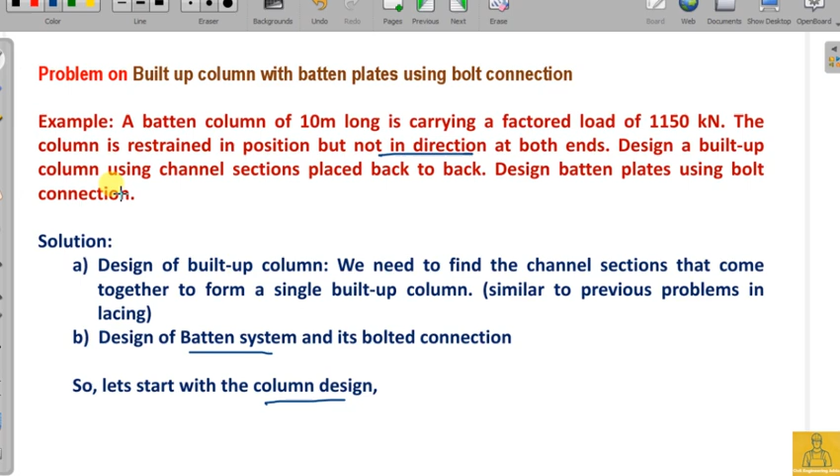This is the solution. So let us start with the design of column. The load acting on the column is 1150 kilonewton and the length L is equal to 10 meter, that is 10 into 10 to the power of 3. But in this case, I am multiplying with 1 because this L is nothing but L effective in this case, because both ends are restrained in translation but not in direction. In this question, it's restrained not in direction but in position. So it is hinged, therefore K value will be 1 and therefore K into L is L.

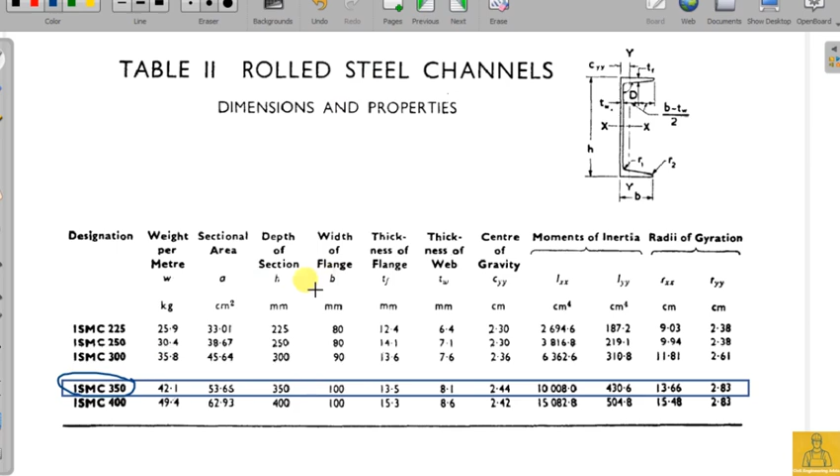53.65 centimeter square. You can convert into mm square by multiplying with 100, and you get center of gravity CYY, IX, IY, RXX, RYY, and flange thickness.

What is the flange thickness? 13 point something. Flange width B is 100, thickness of the web is 8.1, depth of the section is 350.

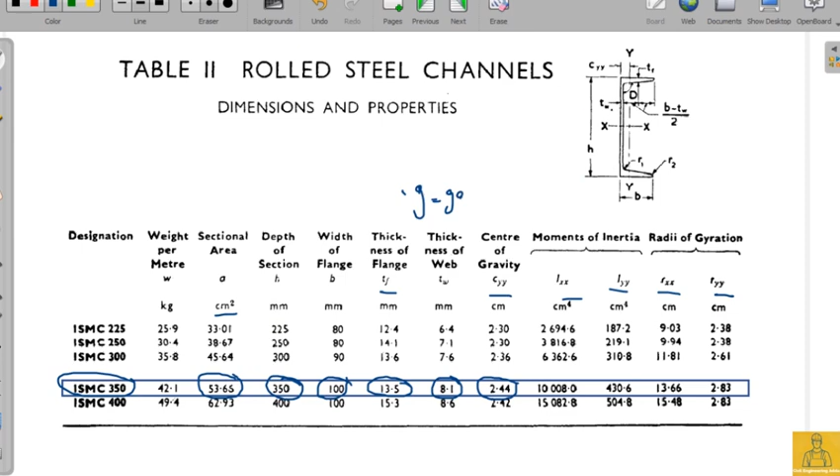And see here, gauge is taken as 60. Okay, so now

we are providing actually more area than required, isn't it? We are providing each channel section whose area is 5366, so into 2. This is the area that we are actually providing.

Now let us find out what is the actual FCD. Initially in this step we have assumed the value of FCD, isn't it right?

We have assumed the value of FCD to find out the area required, because we have the formula P equals FCD into area A.

In order to calculate A, I should know the remaining two terms. So I know P, I assumed FCD, but this FCD which I have assumed is just meant for finding out the channel sections required.

But now I have decided what section to be used, and I know what area I am providing for the build up section. So now calculate what is the actual FCD.

Okay, so how do you get this? This is simple. You can get this FCD. FCD is obtained by

table 9C of IS 800. But in order to find out the actual FCD, you need to know what is the slenderness ratio of the built up section, built up column, and also Fy of steel.

Fy of steel is 250, you know that, 250 Newton per mm square in all the cases. You need to know what is the lambda of the built up section.

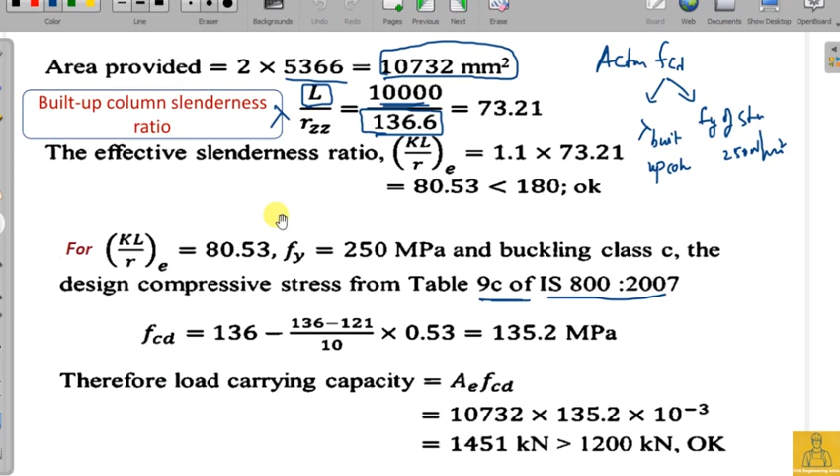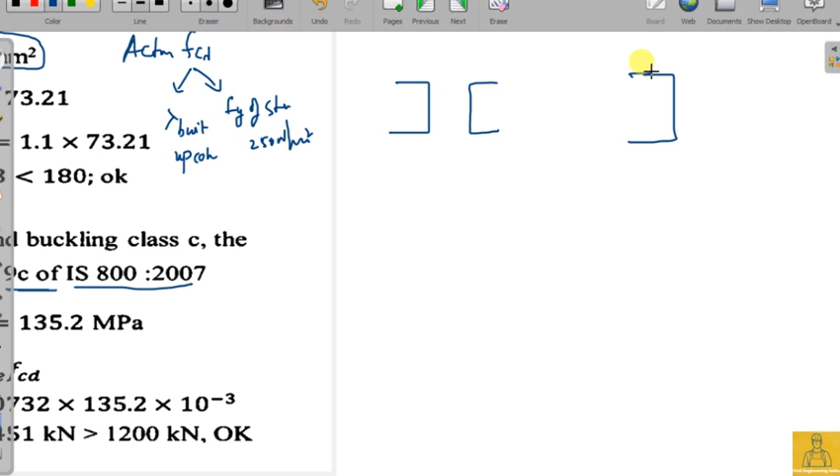Okay, let me take this. See, this is how the channel sections are being connected. Actually, channel section is something like this, right? This is the

ZZ axis, and this is YY, and this is the ZZ axis of the build-up section, and this is YY. If you notice here, this individual channel section has radius of gyration about ZZ and YY.

And in a similar way, for the built-up section also, you have RYY and RZZ. See, this axis, ZZ, is passing through the centroid of the channel sections, built-up section horizontally, and in this individual case, it is passing through the centroid of this C section or channel section.

But in both these cases, RZZ of the built up section is going to be equal to RZZ of the individual channel section. About ZZ, it is not going to change.

But RYY of the built up section is not going to be equal to RYY of the individual sections, because the axis has been shifted, but the ZZ axis is not shifted, it is passing through the centroid.

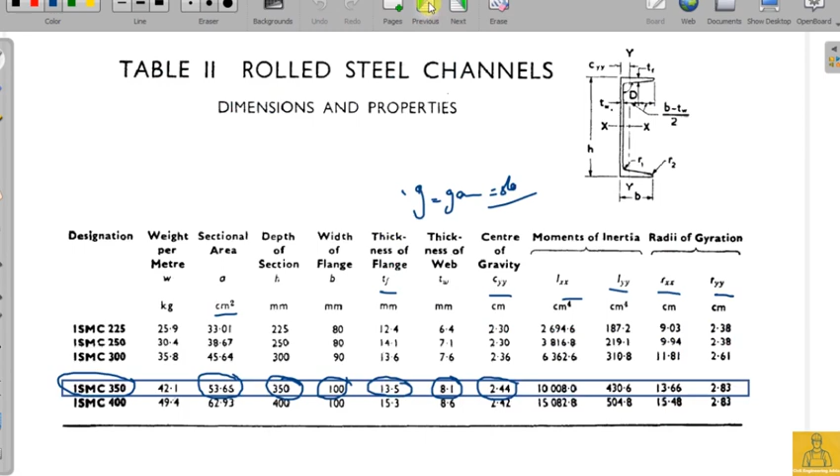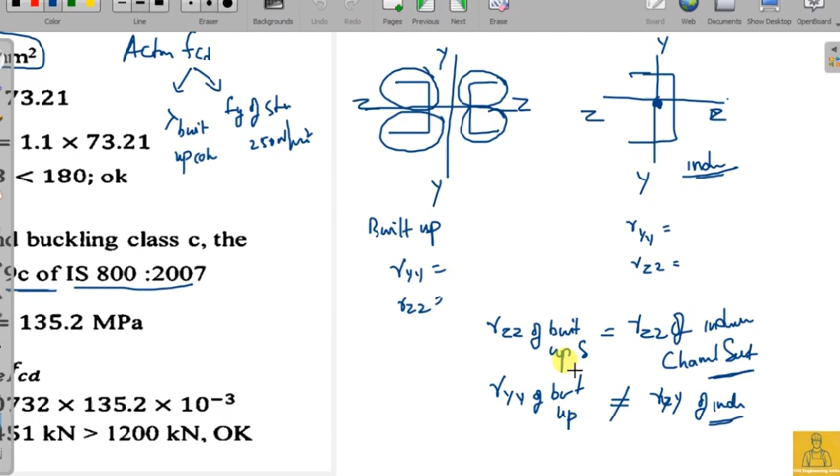From the previous slide we have seen the RZZ of the individual channel section is 136.6, so you can take the RZZ of the built up section also as the same. That is how I got this RZZ as 136, even though I am calculating the lambda of the built up section. So I got 73.21.

Now I know that this slenderness ratio has to be increased by 10%, so multiply by 1.1, and I got 80.53, and this slenderness ratio should be less than 180. Yes, of course it is, so safe.

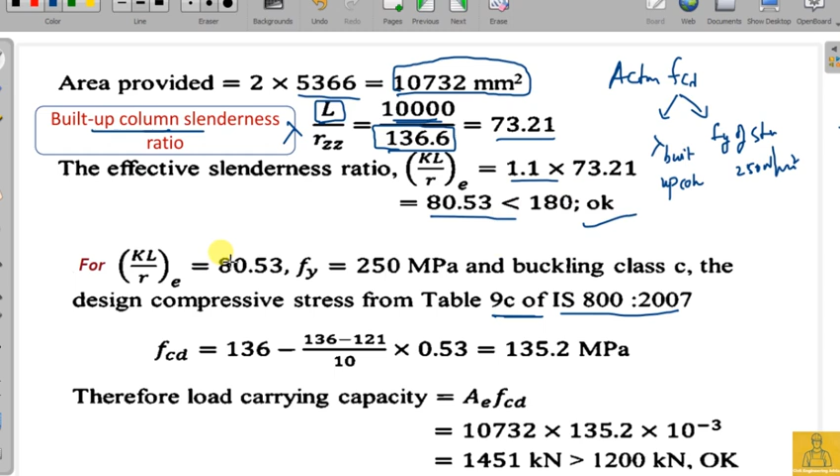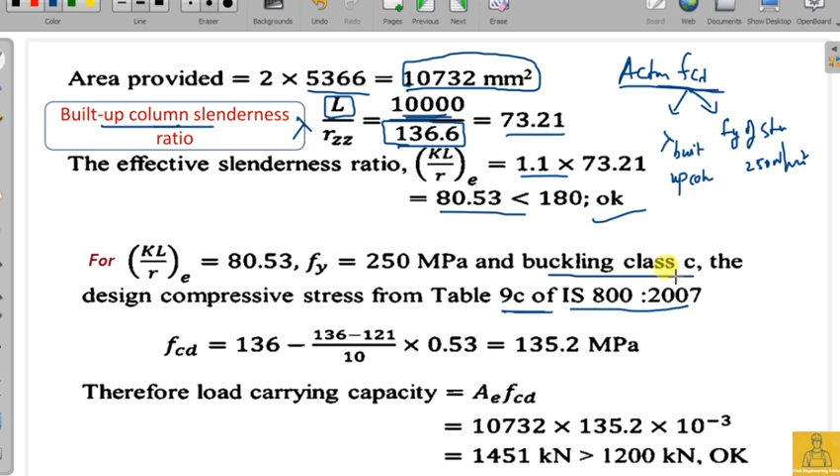And the next thing here is now you need to calculate the FCD. That is the main objective here at this point, right? So we know what is lambda, that is 80.53, and Fy 250, and this column belongs to class C, buckling class C. This channel section is going to be belonging to channel buckling class C.

How do you decide which section this is belonging to, class C? Based on the thickness of the web and width and everything. We have a table which we have seen earlier from the code book, you can find out the buckling class.

The design compressive stress from table 9C of IS 800 2007 will give you the FCD based on lambda and Fy, as 135.2 megapascal. So this is the compressive stress that this built up section can take.

So you know that force equals stress into area. So compressive force, design compressive force, equals compressive stress into area. So what is the load that it can take? Compressive stress 135.2 into 10 to the power minus 3 into area will give you, in terms of kilonewton, 1451 kilonewton.

But the actual load that is coming onto this column section is 1200. So the strength of this column built up section is greater than the load that is acting on it. Therefore, this section is safe. We can proceed to the next step.

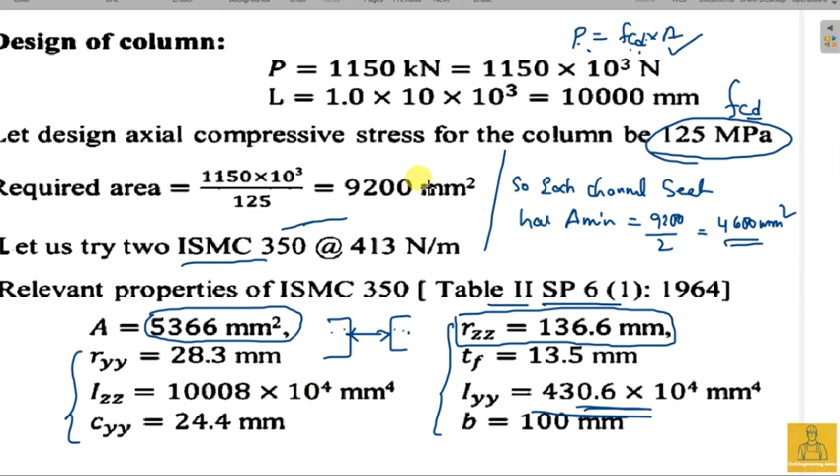The denotation is a little bit different from what is used here. Individual channel section's IYY bar dash is different - this is individual IYY. We have already seen the section properties in the previous slide, 430, and CYY as 24.4.

So let's substitute those values here. You don't know what spacing you need to provide yet, that is what we are trying to find out here. So put that value, and we know the IZZ value from the previous slide, and on substitution you will get it.

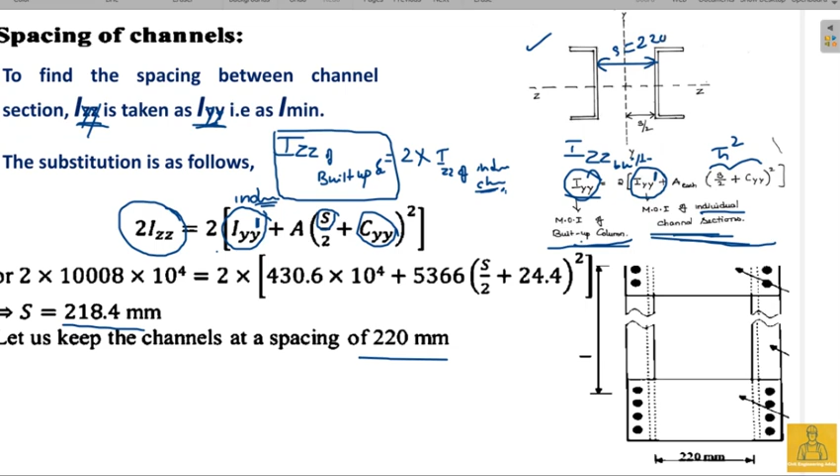So let us keep the channel section at a spacing of 220. We are just rounding off, so the spacing S between these two is 220 mm. We know the spacing now. So what should we do now? We have to go with the battens now.

So we have completed the first stage: we found the dimensions of the channel section forming the built up section, and second, the spacing between the two channel sections. Now we are designing how to connect these two channel sections with battens, what should be the dimensions of the battens, and we have to perform certain checks.

So the spacing of batten, according to clause 7.7.3 of IS 800 - section 7.7 contains all about these battens. It is very easy to remember, no need to even memorize these conditions, you can simply get these from the code book.

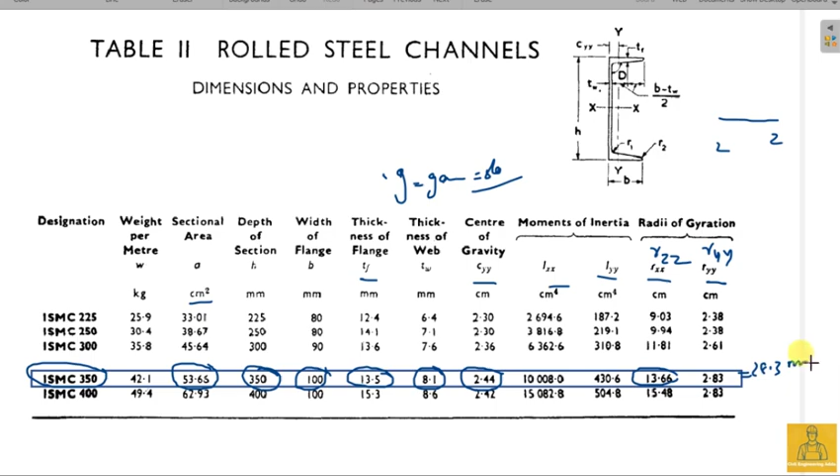So RYY is the minimum, so you have to put the RYY value here. And of course it has to be less than 0.7 lambda, that should be checked, and it should also be less than 50. So these are two conditions here. We are actually trying to find the spacing required between these two channel sections, the batten section.

C is the unknown, so use that condition. C by RYY, that is slenderness ratio, should be less than 0.7 times lambda. So you can get C should be less than 0.7 times lambda into RYY. So for our case you just take C as 0.7 into lambda RYY. Now put the value of lambda and the RYY, and you will get C.

Of course, how do I get this lambda now? Lambda is nothing but the slenderness ratio in this case, that is 80.53, which is obtained from this slide here - 80.53 slenderness ratio, the effective slenderness ratio of the built up section.

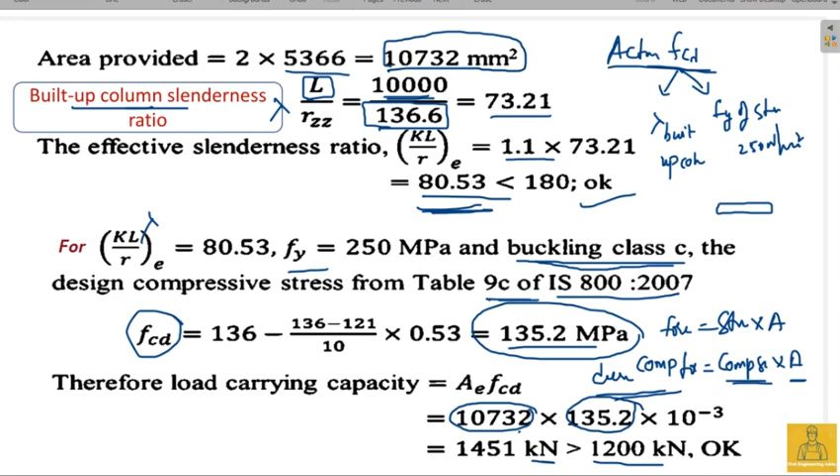So the slenderness ratio of this portion should be less than 0.7 times lambda of the built up section. This is the built up section. There is a very good chance for you to confuse the slenderness ratio of individual sections with the batten slenderness ratio and with this built up column slenderness ratio. We talk about the slenderness ratio of all these terms, so you should get used to this, where we are using which parameter.

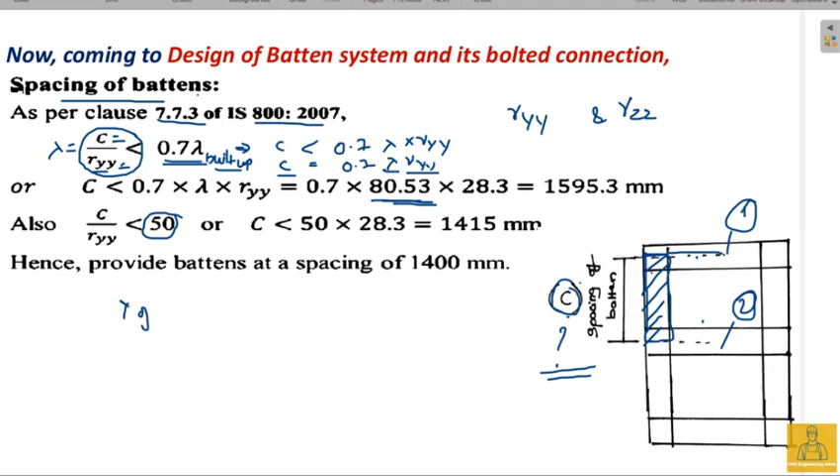Okay, so lambda of this portion should be less than 0.7 times of lambda of built up. Of course, lambda of this portion is given by C by R minimum or RYY, which should be less than 0.7 times of lambda built up.

Lambda built up is already found out in the previous step, that is 80.53. So C should be less than 0.7 times of 80.53 into this RYY comes on to this side, that is 28.3.

And you take this, C should be, or take equals to, in this case, 0.7 into 80.53 into 28.3. So C is 1595.3. This should be the minimum value. And also it should be less than 50, right?

So C obtained from this condition is 1415, and C obtained from this above condition is 1595. Take the minimum value, so 1415. So C should be less than this value, isn't it? So C is taken as 1400 mm.

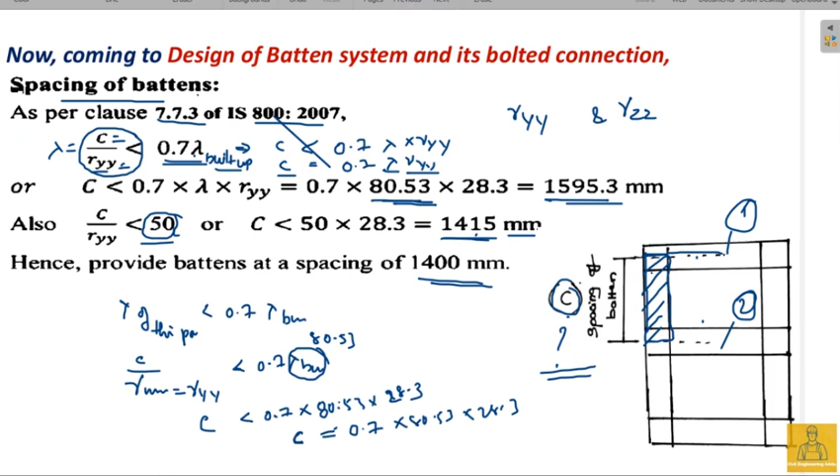So now, of course, we have seen this earlier. What is A, AI, T and L? So A is nothing but S plus 2CYY, AI is equals to S plus 2G, where G is gauge, taken as 50 in this case, and T is the thickness which is obtained by 50th part of AI. This is nothing but AI by 50, and L is equals to S plus 2B.

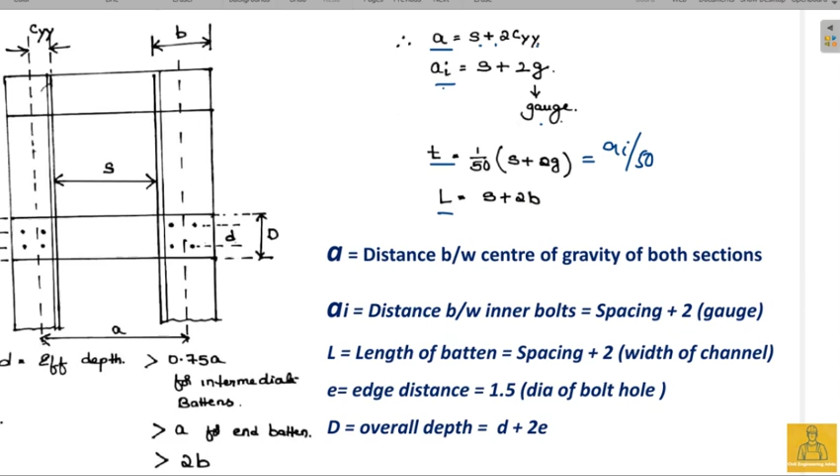So, size of the battens. You know what is the spacing of the battens? No. Find out what is the distance, size of the battens, the thickness, the width and everything.

So you have to decide whether it should be a welded connection or a bolt connection before that. So I have decided to connect these battens with the column by using 20 mm bolted connection.

So edge distance E is given as 1.5 times of hole diameter. You know hole diameter is 20 plus 2, diameter of the hole plus 2 mm extra we take, and which is 33, and of course you can take this as 35, and effective depth is S plus 2 CYY.

So you will get 268.8 mm, but this should be greater than 2 times of B. Okay, B is already 100. We know that width of the channel section. So 2 times of, is it satisfying? Yes, it is satisfying. Therefore, chosen effective depth is safe.

Now overall depth is small d, effective depth with plus 2 times of edge distance E, which is equals to 334.8 mm. And the required thickness of the batten is 1 by 50th of this, AI. So this is S plus 2 into G. G is the gauge taken as 50 in this channel section, and which gives you 6.4 mm.

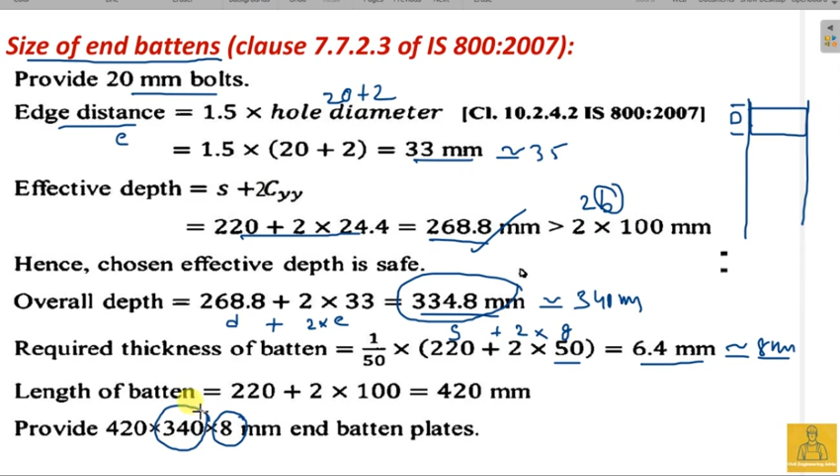And what is the length? It has to be this, S plus 2 times of B. Okay, let me draw this. This is the channel section, right? This is B and this is B and this is S. So total will be S plus 2B. Okay, 220 is S plus 2 into B, 420.

So you found out what is the dimension of the batten. Now you need to find out the batten dimensions of intermediate. So you know that the effective depth changes. It has to be taken 3/4 of that for the intermediate batten.

So this, and you have to check whether this is greater than 2 times of B or not. It is greater than this, therefore it is good, and you can just round off this to 210. So this is the effective depth, hence effective depth is 210 mm.

Overall depth is D plus 2 into E. You can round it off to E to 35. Of course here I did not do that, and it is giving 276 mm. Of course now you can round this off to some value like

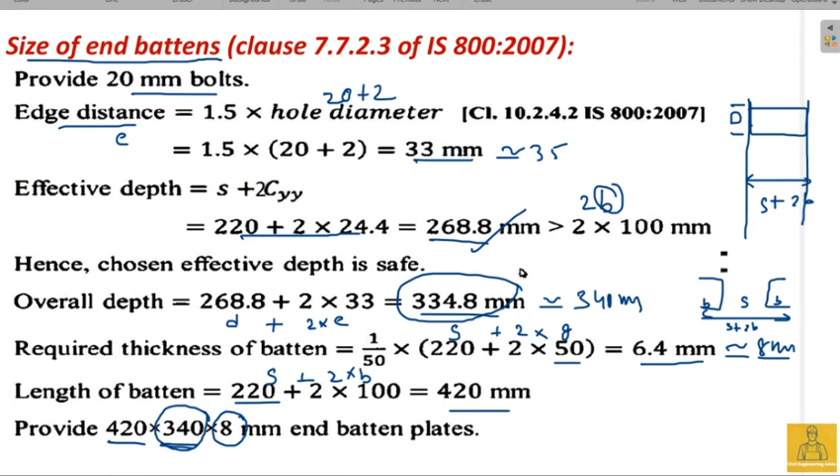300 mm. Okay, so the length of the batten will not change, end batten or intermediate batten same, but as the effective depth changed, the overall depth also changed. It is 300 in this case and 8. So as you can see, in this case the depth is 340, width is of course the overall depth is 340, and in this case it is 300 only, and intermediate battens will be lesser depth will have. Okay, so we found out what is the batten section needed now.

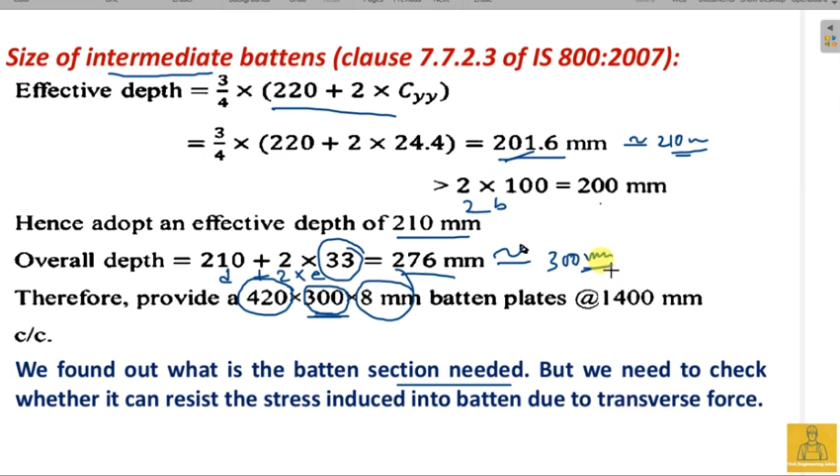We need to check whether the batten can resist the stresses induced by transverse force. In this built-up column with battens, when shear force V acts, which is 2.5% of axial load, these batten planes share that force. We have two batten planes here, so each takes half of it. But the total V equals 2.5%, so this is the total transverse shear force.

There is also a longitudinal shear, which equals Vc by Ns. The spacing of battens, as decided earlier, is 1400 mm. This is the transverse shear force, and this is the longitudinal shear force due to moment.

The number of parallel planes of battens is 2. We have two channel sections connected this way, with a batten connected here, and it goes like this, so we have two planes. When V acts, plane 1 and plane 2 resist it, so N equals 2, as in the lacing system. S equals, as we already found out previously, 220 mm.

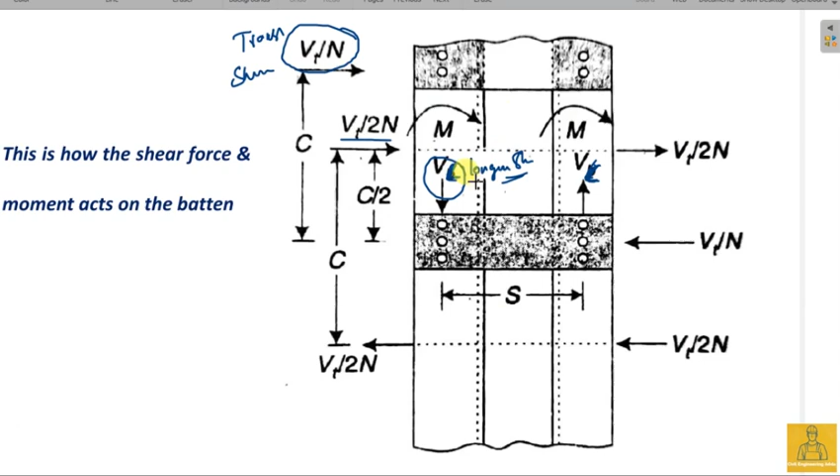Because of this, stresses develop due to the transverse shear force and the bending moment. For the shear stress, you can easily find this is the shear force and this is the cross-sectional area of the batten. The batten length is about 420, the depth is 340, and thickness is 8 mm. So the cross section is 340 into 8, that is the area.

This is the shear stress due to transverse shear force, this is the value. What is the bending stress? It's 6M by t d square. How did I get this equation? From M by I equals F by Y, so F equals M into Y by I, which is M by I by Y, and M by Z.

F equals M by Z, and that's where I found this F. So this bending stress is nothing but this small f. For Z, you substitute the section modulus value, t d square by 6, and you get this equation. Upon calculation you get the bending stress. Remember, the bending stress should be less than Fy by gamma m naught per the code book, and the shear stress should be less than Fy by root 3 into 1.1 m0.

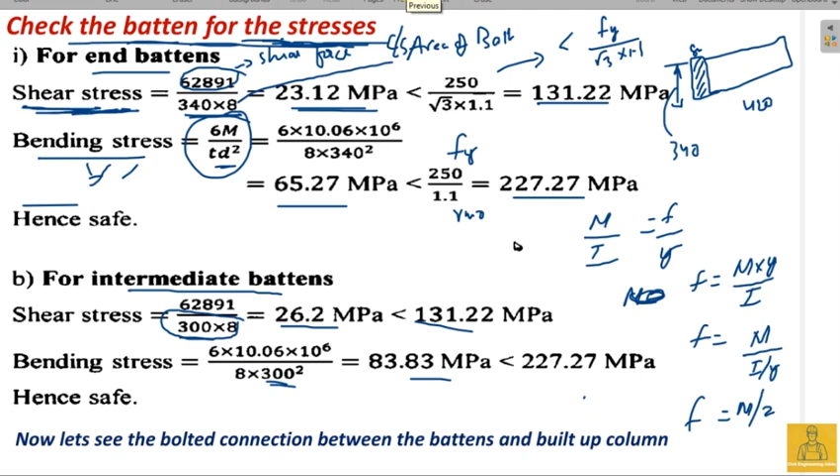So what is the actual force coming onto these bolts? Whatever force is present, let me show you. See here, this is the longitudinal shear force that is acting on the batten. Okay, see, this is the batten, this is the longitudinal shear force acting.

When this shear force is actually acting on this batten, the shear force is being transferred to the built-up column by the bolts, isn't it? So the bolts are actually experiencing the same shear force. Longitudinal shear force acting on the batten is equal to the shear force acting on the bolt. So that is taken as 62.89 kilonewton.

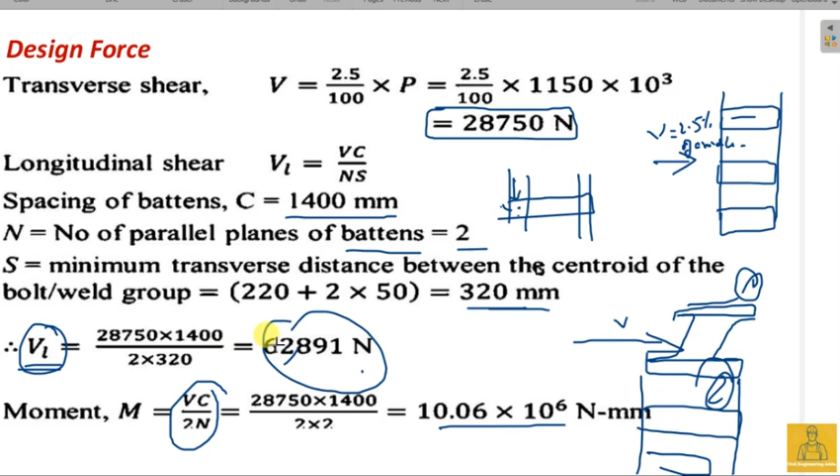So that is why, in order to calculate the number of bolts, the force acting on the bolt is taken as 62.89 kilonewton or 62891 Newton, divided by the strength of each bolt will give you this. So how many bolts do you need? You need 2 bolts.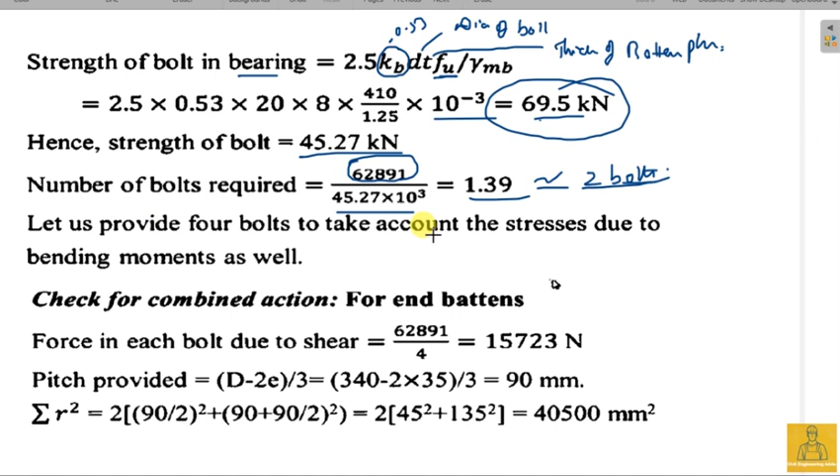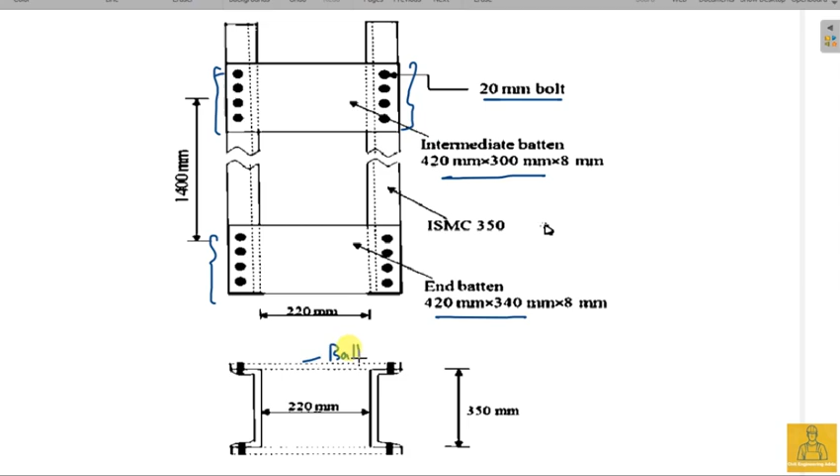But let us provide 4 bolts to take into account the stresses due to bending moment as well. So as you can see, we found out that we need to use 4 bolts on each side. These are the 4 bolts that are being used, and this is an intermediate and this is end. So the length is going to vary, and the span is going to be 1400, and this is the batten, this is the top view, this is the side view.

So these figures are important, showing all the arrangement of the battens and everything, bolt connections and everything.

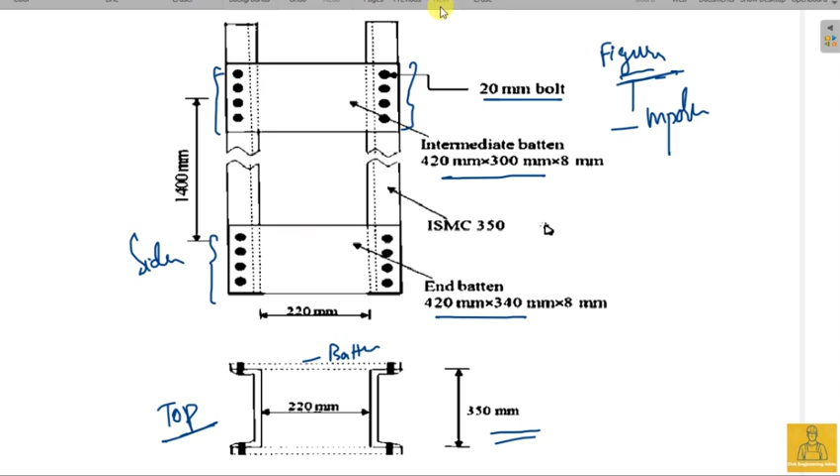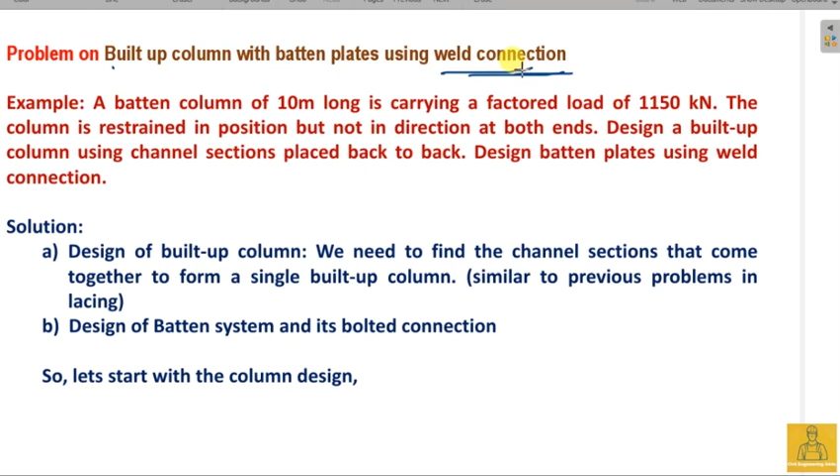So in the next video we are going to discuss the welded connection. We are going to consider the same problem, and we are going to use weld connections to connect the batten with the built up column. Okay, thank you.